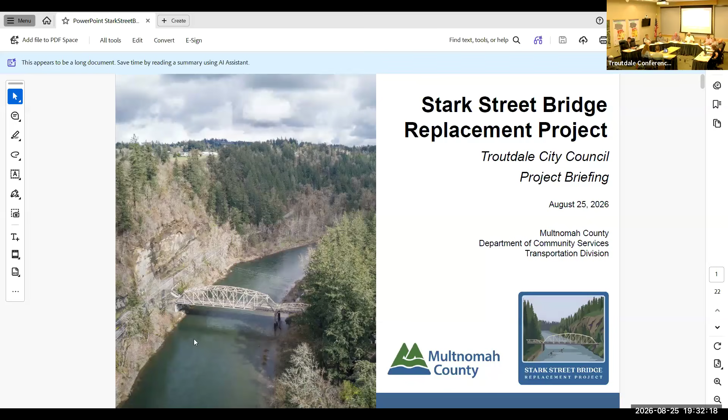I'm an engineer with Multnomah County in the Bridge Shop. We're really excited to come back to this group and provide an update on the Stark Street Bridge Replacement Project. We were here in May, and we just want to share what we've been up to, some key advancements in the project we're about to share with the public imminently, and answer any questions you may have.

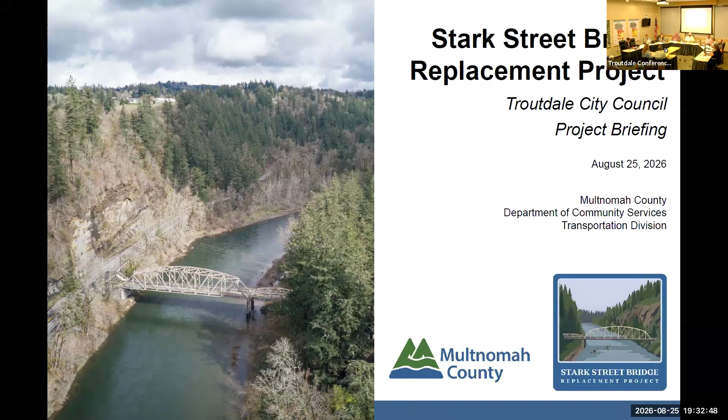As a reminder of what we talked about in May, we were just kicking off the project, so we presented the purpose and need of the project, the location, the context, why the county feels this is a really important project to invest time and energy in, and we shared a lot of the issues we're having with truck traffic turning onto the bridge and some of the emergency repair projects you might have been familiar with. We also shared an upcoming survey we were putting out in the community to understand how the community is using this bridge and what is of interest to them.

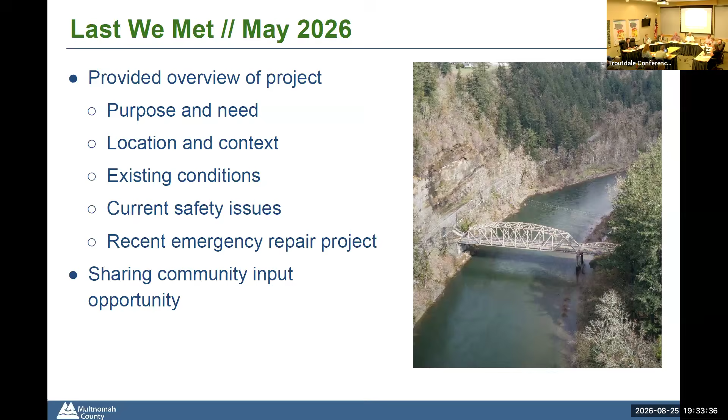So we're back to you today. We want to share the results of the survey and outreach that we did, share with you today a draft recommendation of the design option we feel is the best solution for this location and bridge, and also share another outreach opportunity that's going to go live next week, asking the public what they think.

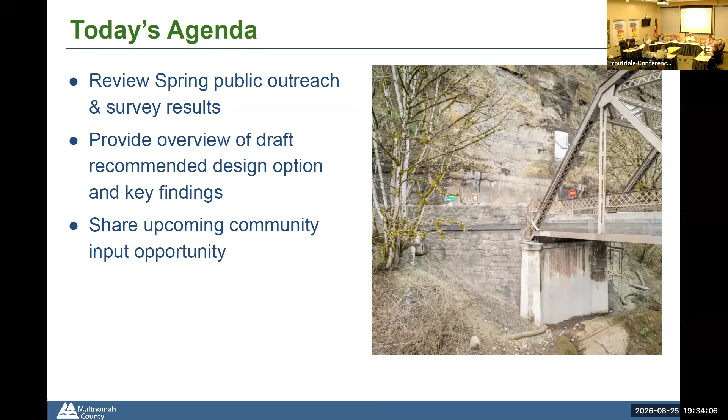Before we jump into that, I want to provide a couple brief recaps of some basics of the project. Generally, the purpose and need: built in 1914, this bridge is over 100 years old. It doesn't really meet the current safety needs of the community, like how much weight it can carry, the width, and also just the burden of an aging infrastructure in the county system. We're really looking for an opportunity to build a new, safe, seismically resilient bridge in this crossing that will generally be what the community needs for the next 100 years.

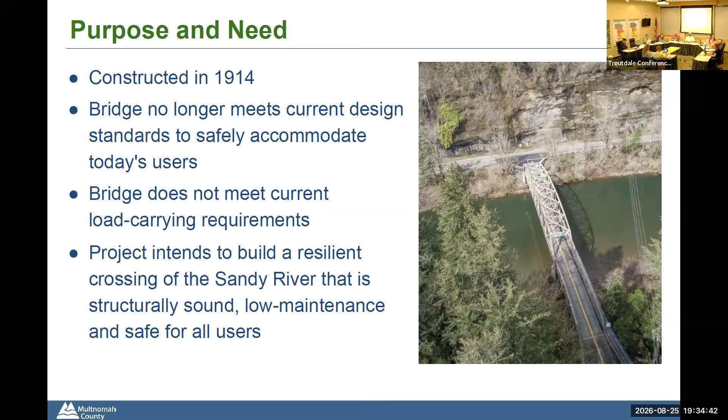A brief overview of where we are with our current schedule in the current phase, which is the environmental review phase. As I mentioned, we kicked off the project last fall and spring with getting the word out about why this project is important to the community. Then in the spring, we worked on developing a range of options to evaluate for a solution here, and solicited feedback from the community on what we should take into consideration. We're now here in the summer, presenting on that design recommendation, and this coming fall and winter, we hope to finalize that recommendation, wrap up the environmental review phase, and continue to seek funding for future phases.

As a reminder, we only have funding for the current phase, so presumably if we were to get funded, we could start design as early as 2028, and construction in 2031, but of course it's all dependent on funding.

To share a little bit of who we've been talking to, we've really tried to hit many of the local communities around the bridge. We've been to a lot of tabling and briefing events in Corbett, Gresham, Troutdale, Wood Village, Fairview, as well as some of the advisory committees in the area, the Historic Columbia River Highway, both Friends and Advisory Committee, and of course all the Troutdale council meetings and community meetings.

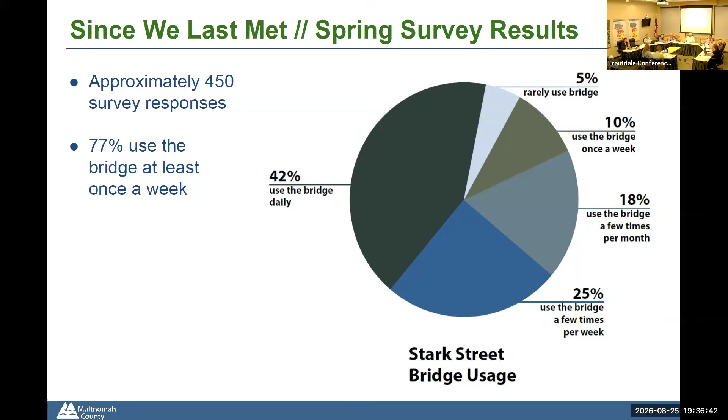What we heard largely, to wrap it up in some key themes: we've heard a lot about issues with the bridge being so narrow. That's a lot of the reasons why we are doing this project in the first place—concerns about traffic delays, safety, both with bikes, pedestrians, and vehicles, and then a small percentage have not experienced any issues. So that's just to give you a flavor of what we're hearing through this survey.

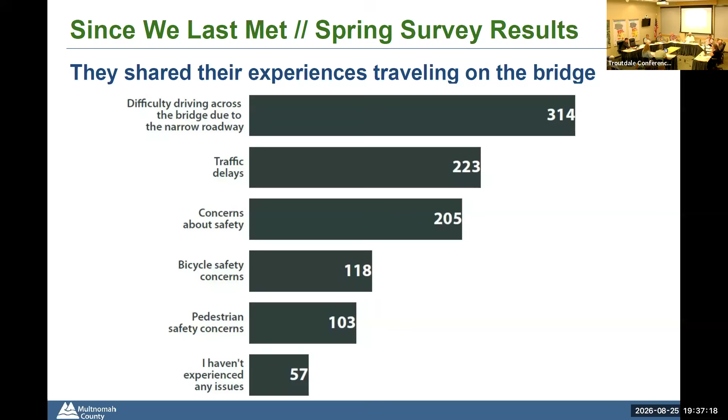And then now I'll hand over to Ryan and he'll dive into our draft recommendation for design option.

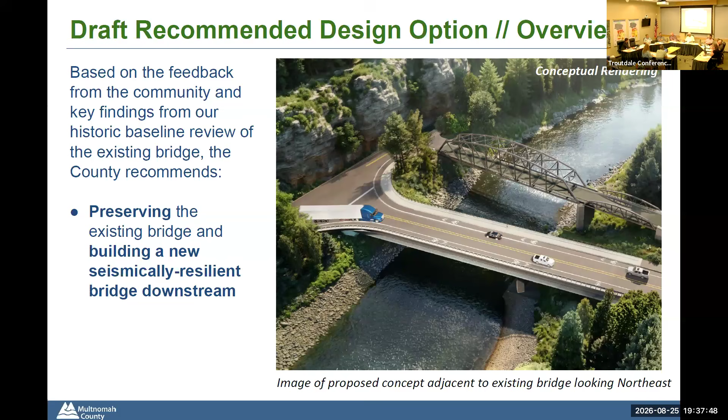The county understands that the community has a strong connection with the existing bridge. It's part of the city of Troutdale and this region. The county also values the community's input and voice, and we feel that this recommended option reflects what we heard from the survey and from a lot of the outreach events that we went to.

This includes the strong support for preserving the existing bridge. The idea is that the existing bridge would be open to bicyclists and people walking around this area, and it would avoid impacting the historic resource of the bridge. This would invite more people onto the existing bridge to take in the beauty of the river and the local area.

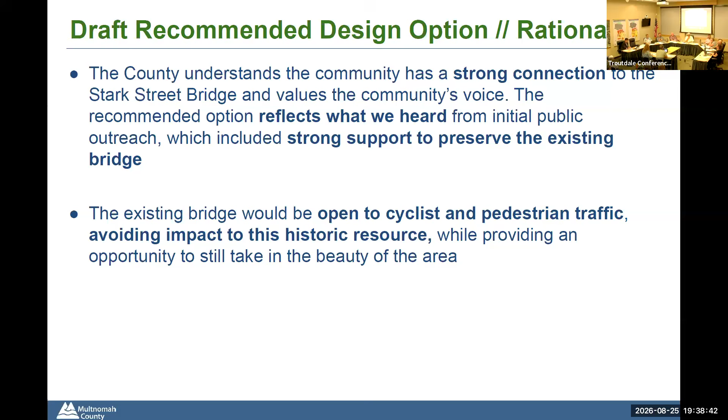Next slide. Gonna jump into some images here. This first one shows the cross-section of the roadway of the existing bridge. As you can see, it's just a 2-lane road, 9 feet 6 inches wide on each lane, which is significantly smaller than your typical lane on a newer roadway. There's also a 4-foot sidewalk that was built after the fact when the bridge was constructed.

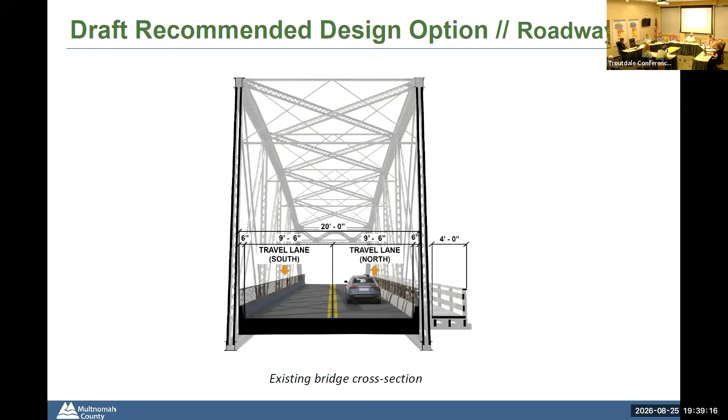And then we'll move over to the new bridge. You can see here it's significantly wider. You have your typical 12-foot lanes for vehicular traffic, a 6-foot bike lane on either side of the bridge, and a 10-foot sidewalk that would serve pedestrians going either way, north and south. So it's significantly wider by 30 feet—essentially double the bridge that you have now.

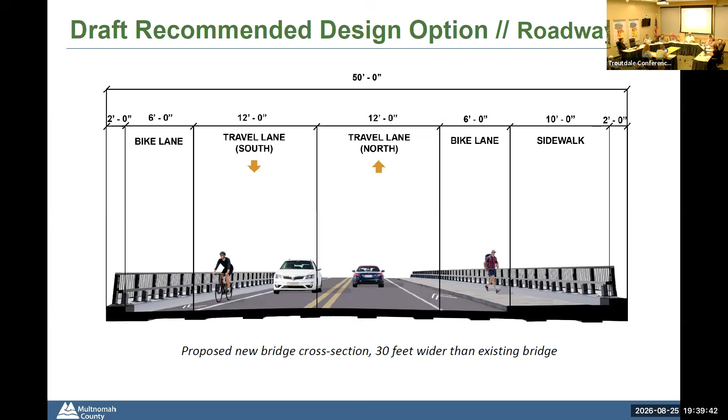Next slide. So we're going to go into some renderings. This is just to give you a visual aspect of what the new bridge will look like next to the existing one. This is on the roadway looking north on the new bridge.

I'll give everyone a few seconds. [Question: That's why you did just sidewalk on the south side and not both sides?] I don't know what the rationale was behind it exactly, but I think it was to tie into the existing bridge, because there's a walkway we're proposing that would go from the roadway to the existing bridge. This would tie in and reduce impacts of building a sidewalk that would connect on the other side.

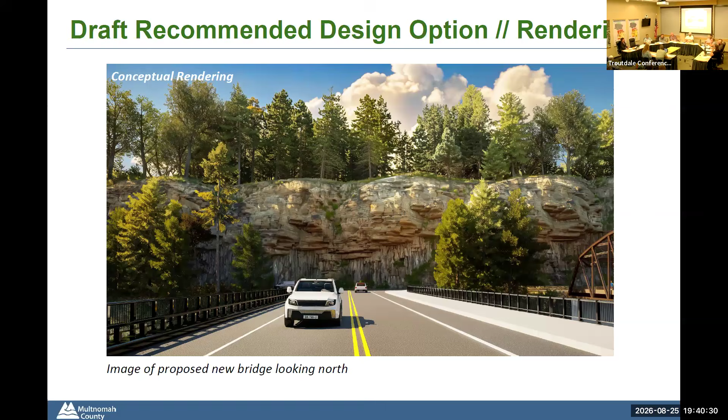All right, next slide. Here we have an aerial view. This is just showing the new bridge on the south or bottom of the visual here, and the existing bridge up above. You can see from this view a much wider turning radius for vehicles coming on and off the bridge to the historic highway.

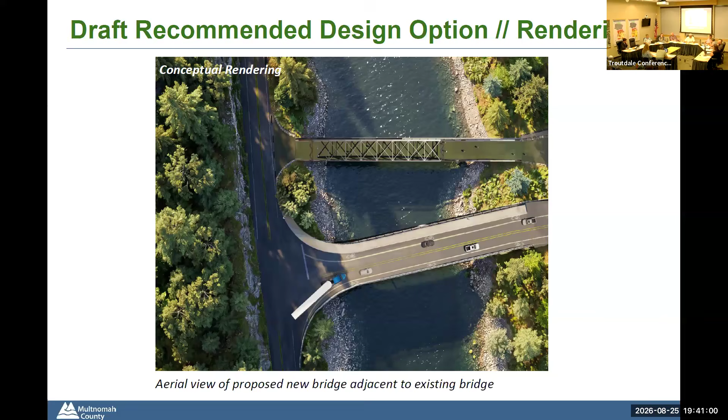Next slide. Again, here is the north approach of the new bridge. Just trying to show the visual—that wider turning radius, and a much improved view east and west for traffic.

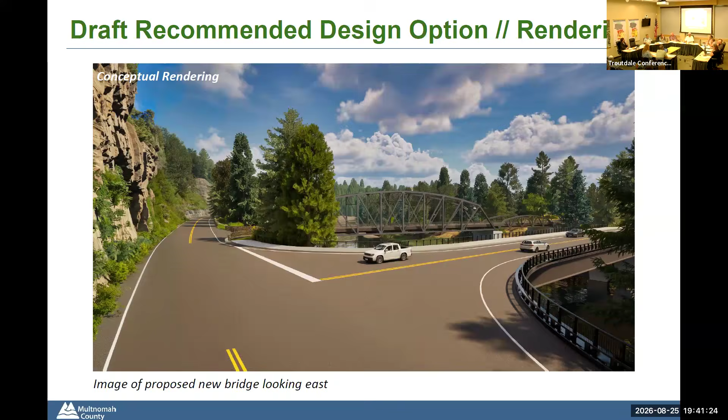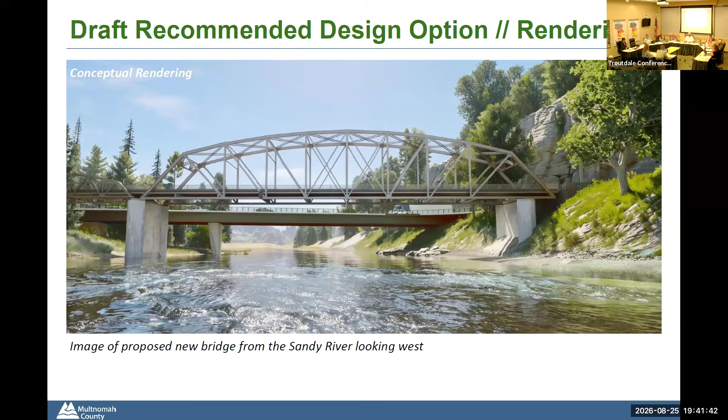All right, so next we're going to jump into some of the evaluation of the range of options. We looked at a myriad of options. We wanted to do our due diligence and make sure we made the best selection. There were some options that didn't quite meet the criteria of the purpose and need of the project. Those options were doing nothing—essentially leaving the bridge as it is—and retrofitting the existing bridge. These two options kind of circle around the seismic resiliency of the project.

If we did nothing, or if we did the retrofit, those would be vulnerable to a seismic event, which would leave us with only the I-84 crossing to get east and west for the local community. The last option that we did not seem feasible was building a new bridge at a different location, which had to do a lot with cost impacts to the local community.

I'll just add on to Ryan's comment about the retrofit. We found that, given the narrow width of the existing bridge and the cost to widen it and improve the foundations, it just didn't seem like the best cost-effective solution for this project. That's just one additional note I wanted to add to what Ryan was saying.

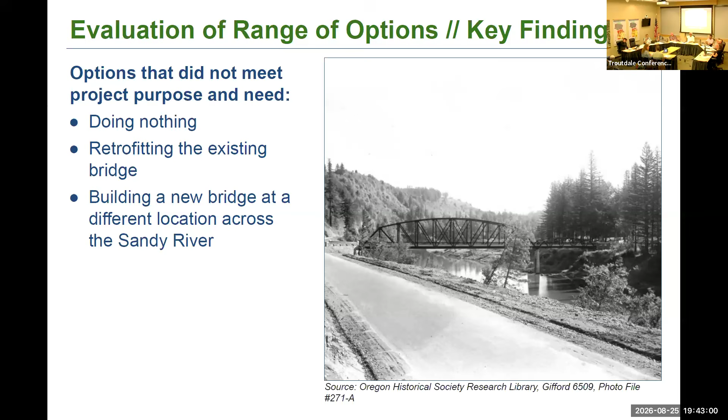The options that we felt best met the project goals and community needs: the first option was to demolish the existing bridge and construct a new and wider bridge along the same alignment. The second option was to preserve the existing bridge and construct a new wider bridge for all users next to the existing bridge, as we spoke to a few slides ago.

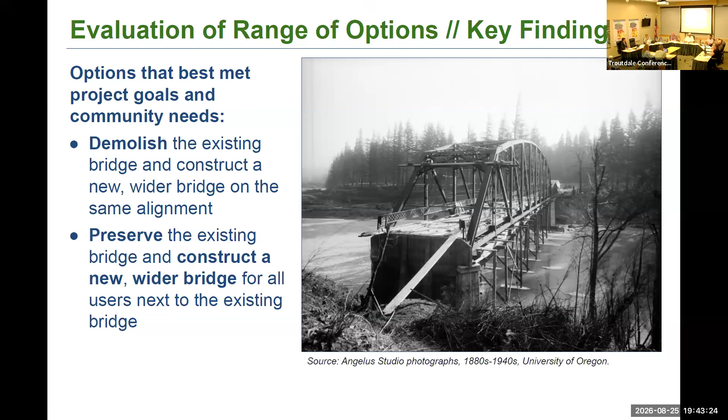Because the existing bridge is eligible for the National Historic Register and is a contributing resource to the historic Columbia River Highway District, we found it would be highly unlikely that the county would receive Federal Highway's approval to demolish the existing bridge. So we concluded that the best option, preserving the existing bridge and constructing a new bridge downstream, is the most reasonable and feasible option that meets the project's purpose and need.

I will add also to what Ryan said, in a similar vein, this conclusion from the baseline study also ruled out the retrofit, or made it very unlikely, just because it would significantly impact a historic resource to the point that, like a demolition project, it would not be approved by federal highways. Not likely. And with that, I'll hand it back to Megan.

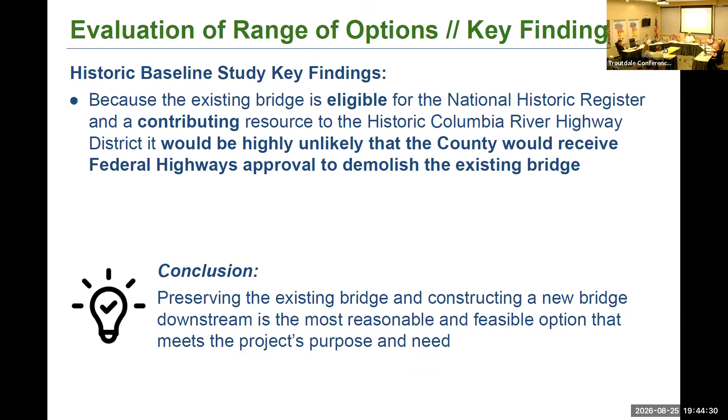Just want to share that we're going to take a lot of the information we presented today, add a bit more elaboration, and share it out with the community in an online open house with an accompanying survey. We plan to launch it by the end of this week or early next, so we're connecting with social media staff to make sure we get the word out on the survey and link.

And we're seeking feedback on this recommended option. Not only will we have the online survey, we'll be out there promoting it through tabling, briefings, and other in-person events. We'll have a virtual webinar, some in-person open houses at Corbett and Troutdale, as well as social media. We really want to hear from the community what they think and get their gut reaction on this proposal.

On the next slide, our next steps: we will take in the feedback we receive and assess if it's supportive of the recommended design option. If so, we'd finalize the recommendation and then complete the environmental review phase, which we anticipate running through spring of next year.

As I mentioned, we do not have funds for future phases, so we'll continue to pursue funding opportunities as they arise and also continue to raise awareness in the community of the importance of this critical regional project. So this will likely be the last time we'll come to present about this project, unless there are major changes based on the feedback we're hearing.

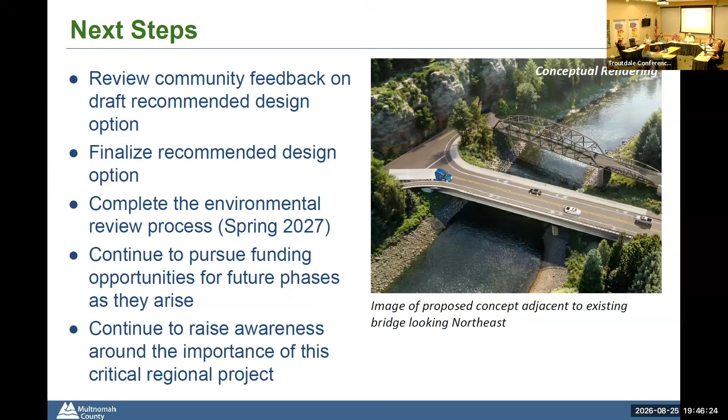All right, thank you. I'll just say I'm delighted that the plan is to not tear down the historic bridge. It is rather important to Troutdale, at least I think so, and I think people here do too. But it does seem your outlining addresses the needs for the traffic improvements that are really needed. Anyway, that's my comment, but how about anybody else on council?

John, have you had contact with the people on the south end of the bridge about property sale? They just bought that? Yeah, we reached out to the new property owner. It's been a light touch, we're still working on some more intense engagement, but we shared all this information with him before we came here tonight. We're eagerly looking forward to connecting with him so we can better understand how this project might impact his property and understand early mitigation ideas.

Anyone else? John, go ahead, Zach, go ahead.

I had that question too about the property across, so I'm glad you asked that. As far as the design goes, I know a lot of comments on complementing the historic bridge that's already there versus making it just look like a highway overpass in the middle of a beautiful scenic area. So it sounds like we're still gathering feedback on design qualities, or is that essentially the render of what the design is meant to look like?